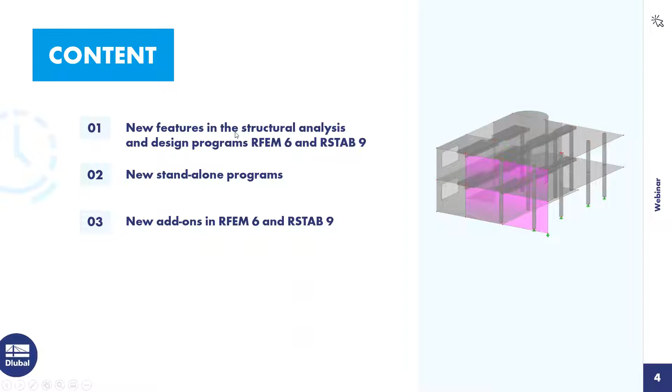Okay, yeah, only some features here. We describe most of them directly in the program, but it was important to me to add here the links to the website where you can find more information.

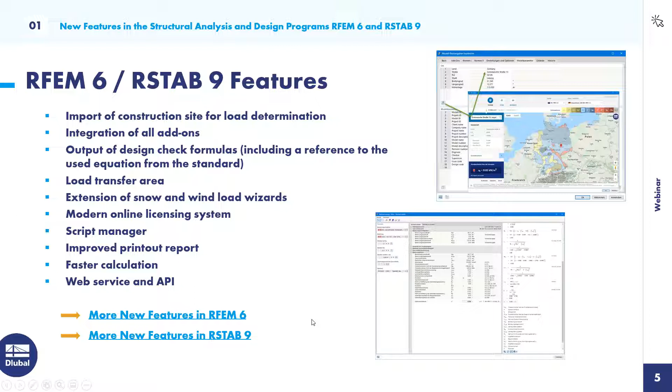Under for RFEM 6, you can see a lot of features, and in this webinar we will introduce only some important features, but you can use the links when you download the slides after the webinar. At the end of the webinar, I will show you how you can find the slides.

Second point, new standalone programs. As already mentioned, RSECTION is a combination from ShapeThin and ShapeMassive for thin-walled and massive cross sections, and the stress analysis. Then an extension of RSECTION, effective sections for the design, for example for cold-formed and thin-walled cross sections. Then RWIND, not only with stationary incompressible turbulent wind flows, now also with transient wind flows.

Then the web service and API, a programmable interface for RFEM and RSTAB. Andreas Niemeyer will show you the web service or parts of the web service later in the program.

Okay, new add-ons: the Steel Joint add-on, all steel connections by using an FE model now. As I mentioned, more information with this link.

The building model, to define and manipulate a building by means of stories. You can consider and display story masses, and it's also possible to output section resultants in global direction for determining shear forces. Those features are quite important for the dynamic modules or dynamic add-ons.

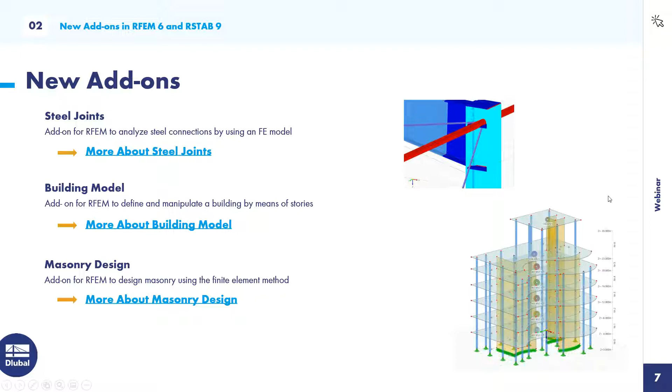Then two more add-ons: optimization and costs, CO2 emission estimation. For example, you can use this model to optimize models using artificial intelligence. I think a very interesting program. Then time-dependent analysis, to consider time-dependent material behavior of members.

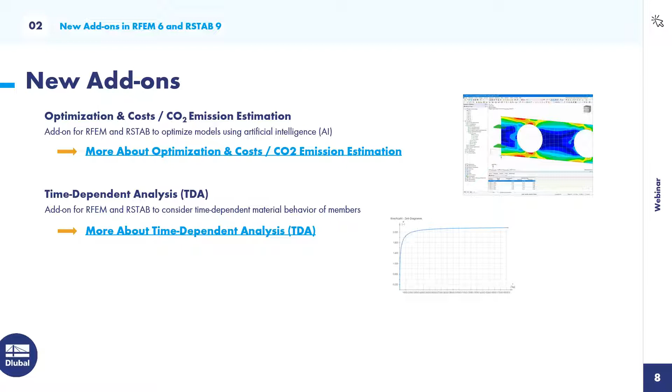I'm coming to the first block, and I'm proud to get the time to show you the first scenes of our new program. I opened our base data dialog, because here is the basic key of our new RFEM 6. Generally, this base data dialog is almost similar to our old solution, but it isn't. You see you get a bigger list of tabs where you can define something, and this I want to show you now in the next few minutes.

At first, before we start, we give a name, of course, like always, maybe intro. And here is our first bigger change in the program. You get now as engineer new types of models, or let's say calculation environments. Of course, we offer the basic plane options, plate options, and maybe member or axial solutions. But you get here, besides this pure plane, also a plane input mode with a 3D calculation.

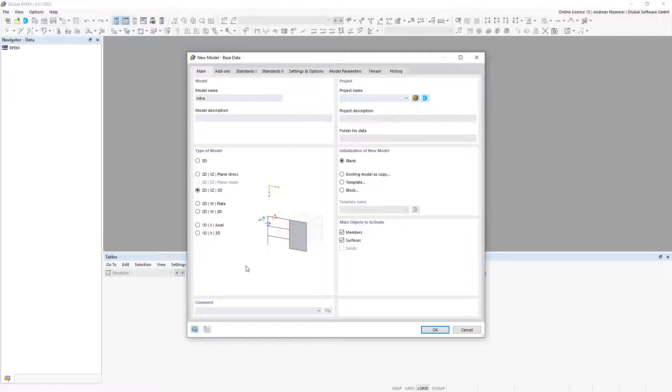We call it internally 2D, 2.5D mode, but this option is available for the plane, plate, and axial solution, and gives you the option that you can calculate plane structures with asymmetric cross sections with loads out of plane in one calculation environment. The keyword for this is, for example, if you want to design a wind bracing of a steel hall with tension members and truss members from angle cross sections, then the angle cross sections can bend out of plane and you get the real stresses on these members. But for our presentation now, I go back to 3D and open the next sheet here.

And this sheet is, let's say, the key for everything. Here you define your task, what you want to do in RFEM 6, and we distributed it here into three main parts: add-ons, our old so-called add-on modules, here analysis add-ons, design add-ons, and special solutions.

And this is our complete list of add-ons now. We got in the past some customer feedback that we offer so many add-on modules, and it's not clear which add-on is for what, so we summed up all this stuff into this list here. If we take a look, for example, on steel design, we have now one add-on for steel design with all standards. Before it was like you have one add-on module for Eurocode, one add-on module for US standard, and now everything is in one package. Steel design makes the steel design for all foreign standards available in the program.

And this logic is quite bigger as it seems now when we take a look on concrete design, because here in concrete design you have also, let's say, all standards behind and also all types of elements, maybe punching nodes, members, and surfaces also.

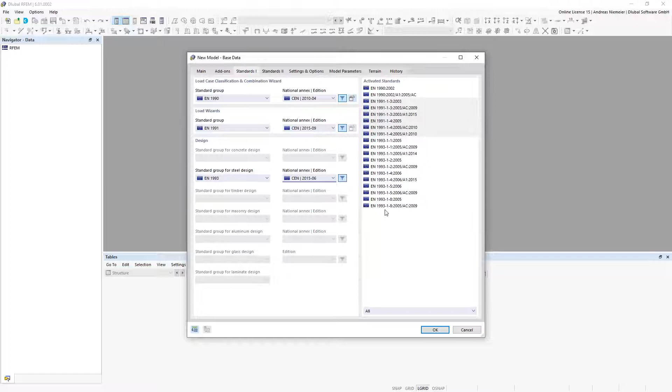And I selected like this here and set up my list for standards, which will be used for the complete calculation in RFEM6. And now I open the program with this specification and want to give you a first view of how it works together. If we open now RFEM6, it looks in the first view like our last generation, but let's say we changed a few points.

For example, here in this navigator structure, we created now a navigator with a cleaned up structure, which means we have basic objects like node, lines, members, and so on, and every basic object has specific types. For example, if we go to nodes, we have here type for nodes. It's the same for members. If we go to members, we have type for members, and all this type for members could be assigned to any element. And the same logic you will find here in the table block below with these two multi-combo boxes, where you can see you have your structure and also basic objects and type for elements. And this should help you not to lose the red line in the program.

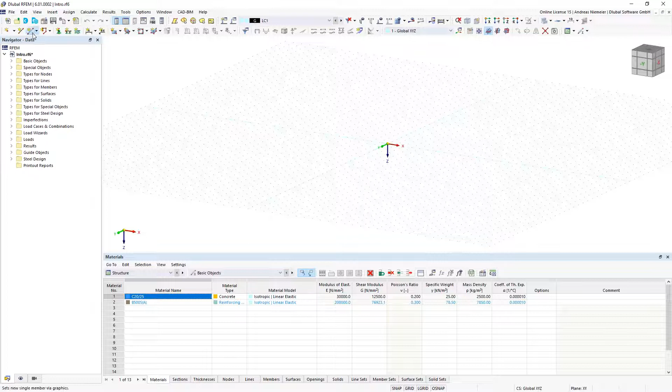And now, how you work with the program. Let's define one member, for example, with a specific cross-section, going to library, going to, for example, rolled cross-section. Let's select an HEA 200 from steel 355, for example, and select it. Then you see you can still pick the grid points like you know it. In the old program, you can define a beam. Of course, you can also place now supports on the end of the beam by drawing a window about.

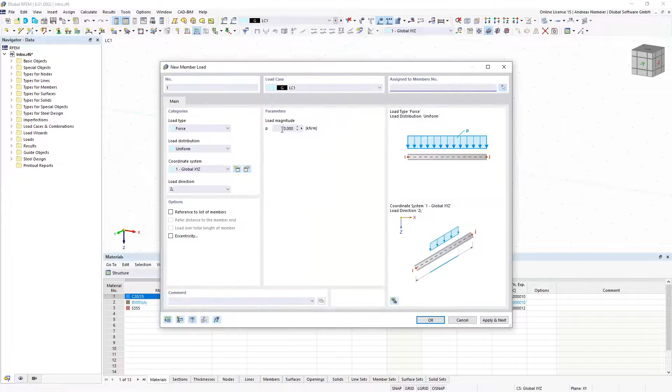And even it's still possible to place a load on the beam here. So for example, 10 kilonewton per meter. So this should give you the information that if you are able to work with RFEM5, you are also able to work with RFEM6. But now there is a specific point where a change is coming.

In the program, RFEM6 always prepares everything so that you can do the design directly. This means after the load input, it's ready for designing. So if you go to calculate, the program creates mesh, calculates load cases, creates design situations for the design, and does a design. So you see all the steps that are done, and it's ready.

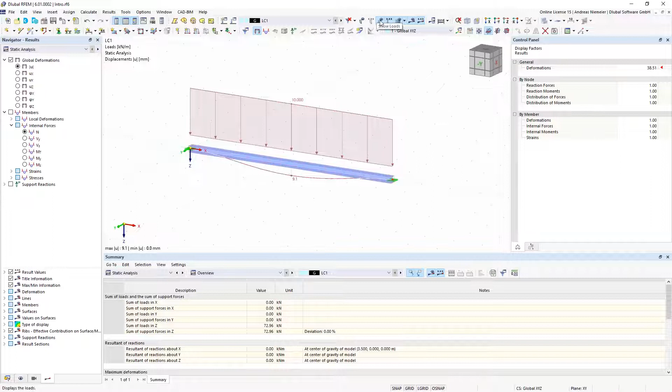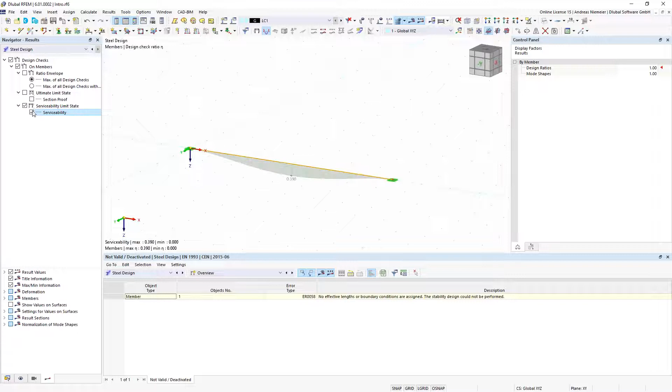So we get, as expected, for the load case selected on the top, the deflections. We get, let's say, forces. Let's use the wireframe model, and we get also a design. So we have here now a combo box where we can select the design, and you see this is the utilization curve of the design, the steel design in this case. You can see a ratio of both, but you can also see only cross-section check or serviceability check, or all together, all lines together in one.

This is now only the graphical depiction of this problem, but we can also display the detailed results in result tables. And this is now new. It's not drawn into a window above the model. It's implemented into the main program. So you get the design ratios as ratios or table rows in the main program by a table design, maybe table by design situation, by loading, or by member.

And if we go to member, you see all checks that are governing here. And if we select one, we can go also into details and see which figures lead to this utilization, which forces are used, which section properties are used, which classification is done, and which figures with hint to standard chapter lead to the utilization.

Because this was also a little bit cryptic, we implemented a formula display where you see the full calculation of the utilization, like a hand calculation, with a clear description of all used variables and filled values. So you can say please show me formulas without and with values. This is a really cool style to display how the design is done without the black box character. And this is not only for steel, but for all types of materials we support—concrete, aluminum, timber, whatever. So this is the new style of display of design checks in the program.

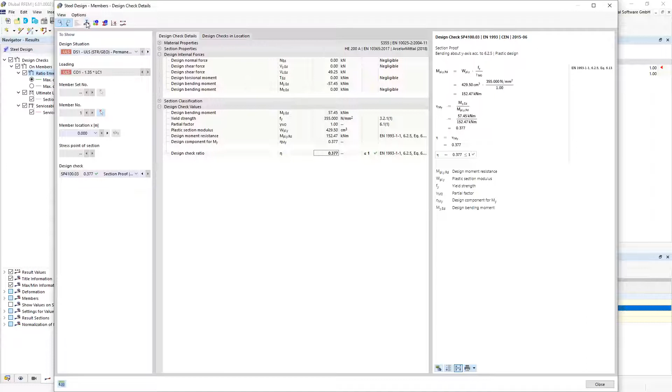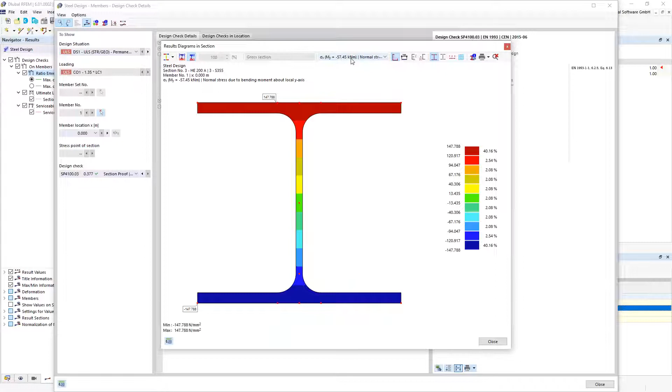If you need more details on basis of cross sections, you will find this button where you can display the utilization on basis of cross section for a selected X place. Here you can not only display utilization, but also the existing stresses for the forces acting. In our case, we have maybe a bending moment of almost 60 kilonewton meter, or also a shear stress, and you can display it on basis of cross section here.

This brings me to the end of the first block, and I give back to Andreas.

Okay, thank you. I show my screen. Do you see my screen? Andreas, do you see my screen? No. Now, now, okay, it took a while. But as I mentioned, we alternate the presentation—some features from Andreas Niemeier, some features from my side.

I go back to the base data, the fifth place from left here. Andreas Niemeier already showed the dialog, but not the model parameters. I would like to show you some more features here, a very good feature.

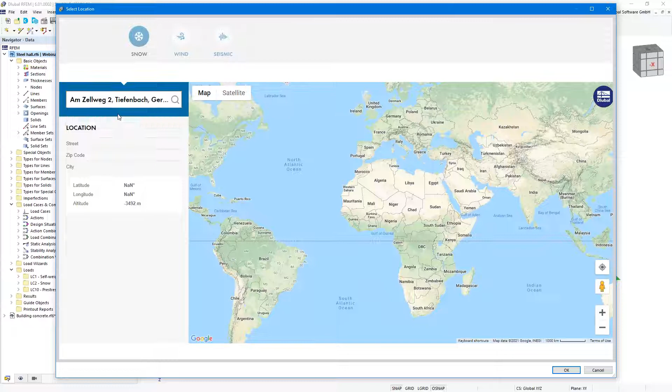The construction site can be specified on a digital map. I can open that map, and this data is used by the load wizards. I enter our location, our main office address in Tiefenbach, Germany. Then I get the snow load zone, and what is important for our calculation, the characteristic value of snow load, 0.51 kilonewton per square meter, the wind loads, and the seismic loads. Then I can apply that, and the program reads all parameters for the wind load wizard and snow load wizard.

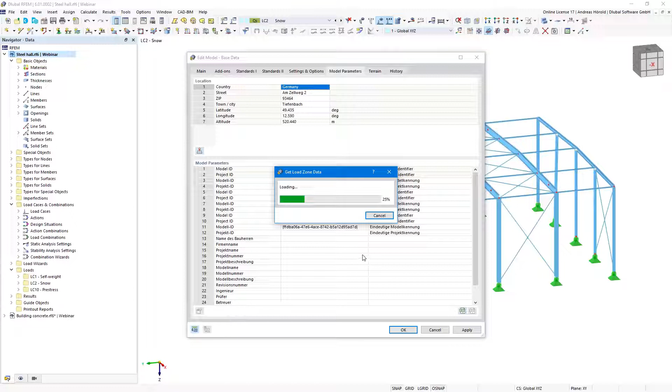And in future also the dynamic values—that's still in work, the seismic loads, the import of seismic loads for the dynamic modules. Okay, that takes some seconds. The website seems to be a little slow at the moment, that's why it takes some time. Now we have to wait. That's the connection between website presentation and the GoToWebinar tool. Sometimes some processes take quite long. When I don't use the GoToWebinar app, that takes only 2 or 3 seconds. It doesn't seem to work at the moment. Maybe I come back to this feature later, because there's a problem with our website, I assume. Okay, I cancel that.

And jump to the next feature, the load transfer surface. If you have such a model, for example with slabs and walls, but you don't want to define all walls because here is a glass facade, then you can use this new feature, the load transfer surface. I will show you how to do that.

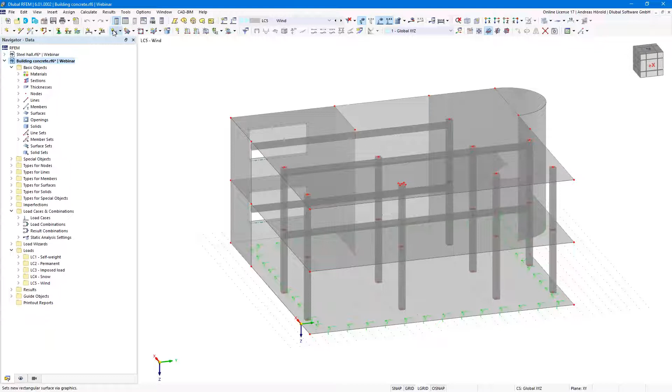I open here a new rectangular surface and the new stiffness type load transfer. A new dialog opens, then the load transfer direction. You need to define the direction in X, Y, or both directions. It's also possible to set a surface weight if you want to consider the weight of the glass facade or trapezoidal sheets, etc. Then I apply that and create the surface.

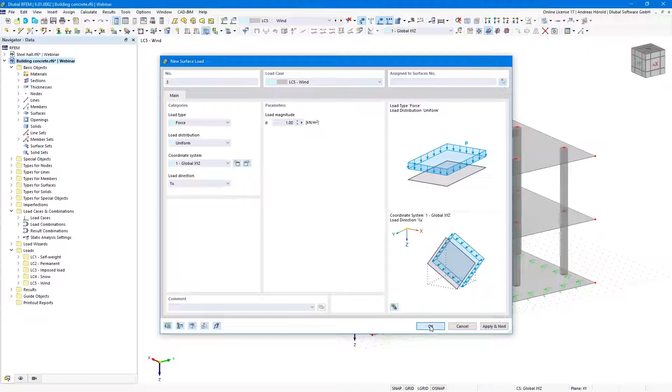Then a small wind load, new surface load—for example 1 kilonewton per square meter, Y direction. That's the load. If you want to see the line loads, the separated loads, turn to the display navigator, and under surfaces select display load transfer separately. Now we can see the line loads here. It's easy to change the direction by double-clicking the surface, then set load transfer in Y direction, and now the line loads are visible here.

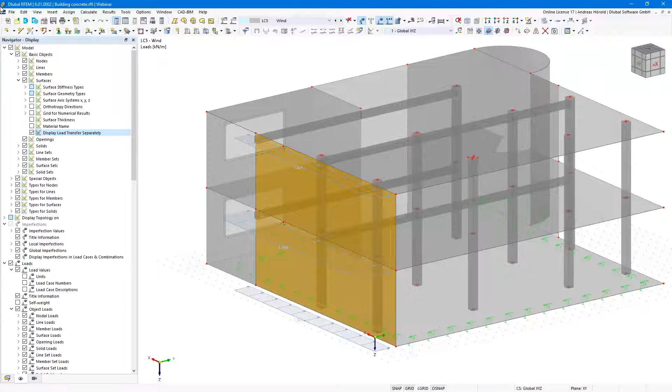Okay, then I hand over the screen to Andreas. I'll take a look at the first model in the meantime, what is wrong there, and then we can turn back to this model later. Andreas, please continue. Okay, thank you.

Let's go ahead. I prepared a model for you, a two-story solid model from concrete and steel elements. I used load transfer surfaces in windows on the roof. I think it will solve us a lot of issues and save time. But this is not the point here.

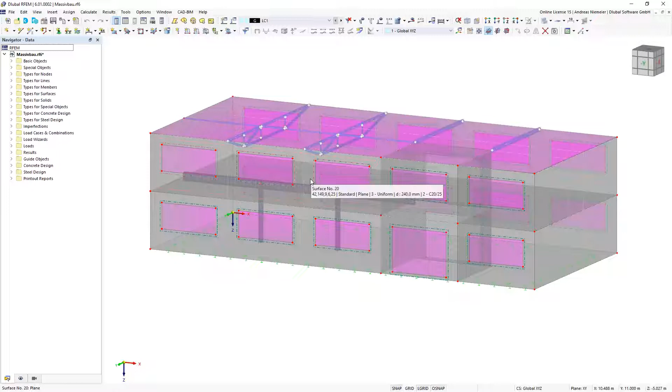I prepared this model to show you how we can specify the design of elements, and take a closer look on the beam elements. Inside the building we have concrete beams on columns, and on the roof some steel beams, truss girders with bracing - typical structures we see from our customers.

Now the question appears: if we have to design the truss girders, we have to specify that the upper chord is supported against lateral deflection on this mid node. As you saw in my first presentation, the program always thinks the design is done for the element and prepares everything, but it sometimes needs more information.

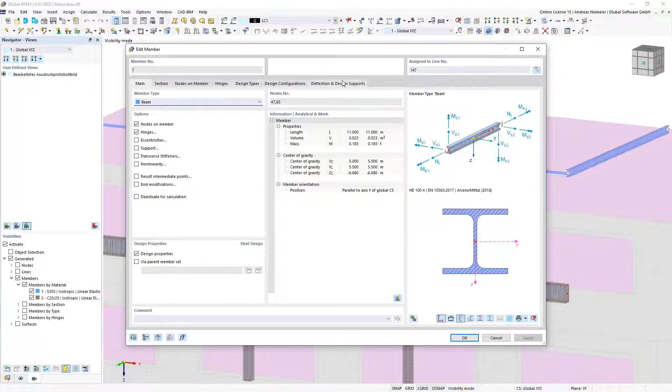If you have to give more information, you can double click on the elements and get into the property of the selected element, with all design relevant options. So here you have sheets where you can define the effective length, boundary conditions, local section reductions, shear panel, rotational restraint, and so on.

For concrete it's something different. Now the task is, we have two apertures, so I have to make a multi-edit and select both to change both. But this is questionable, because if you have a bigger model you don't see all similar objects, and therefore we give you a new function to solve this.

If you go to base data, you have settings and options where you can activate member representatives. If you activate member representatives, you get a sum up of all elements, and you can visualize it. The program visualizes on all elements a colored bubble.

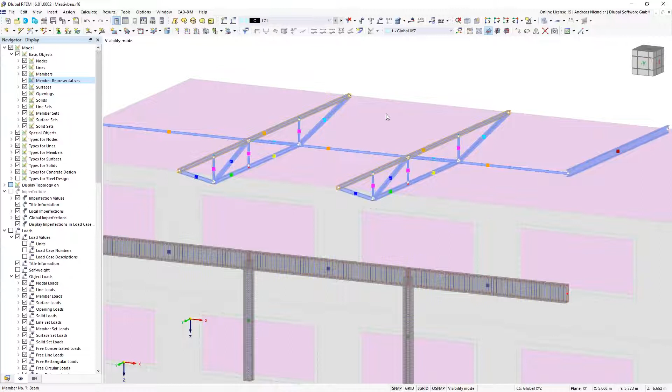Let's select the red one, and you see the program automatically recognizes that these two elements are similar. The same for the vertical elements - it recognizes these are similar too. This means the program found out from our 31 members that we have 10 similar groups, and this information we can use for specification of design properties, for documentation, and for pure calculation.

So this is pure information that helps us save time again. Now back to our primary task to assign some properties.

I can double click this red bubble for the aperture and go into design types, to assign some buckling length definitions using the representatives. Now to the next feature.

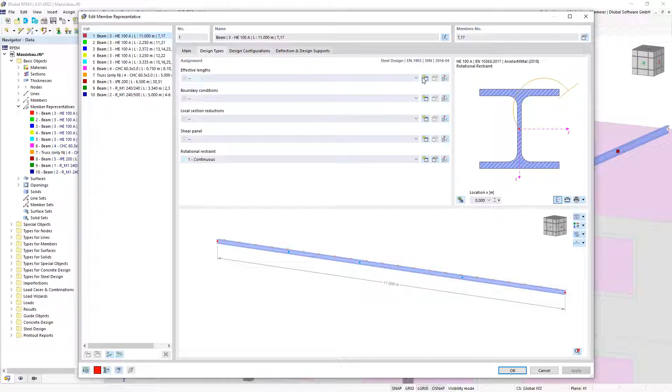If we want to define buckling lengths, as engineers we want to define buckling lengths and segments. If we watch this element, this aperture is supported here, and we have one segment here and here. For this task we prepared effective length types or templates - I call them jackets because I like this term.

So we create a buckling type jacket, which we wrap around these beams. This means we say: please check buckling about Y, about Z, about torsional buckling, about lateral torsional buckling, do it with the eigenvalue method, and make a fixation on the start and end node of the element, without knowing how long the element is right now.

Because we want to apply it on these apertures, we say please do it for this type. The program realizes this type has 1 intermediate node, so I say let's fix the intermediate node. This means for the buckling definition we have one segment for the strong axis, 2 segments for the weak axis, and 1 segment for the torsional checks.

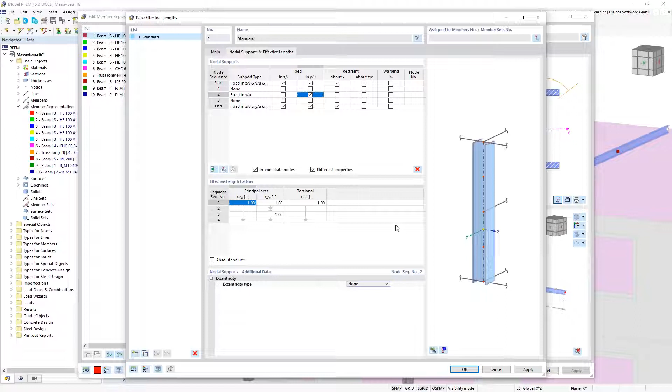If we want to support, for example, also the first one, we can open this setting. Let's go to the steel types, to effective length, and say please check also the first one. And if we confirm it, we get also a fixation on this point and can visualize it.

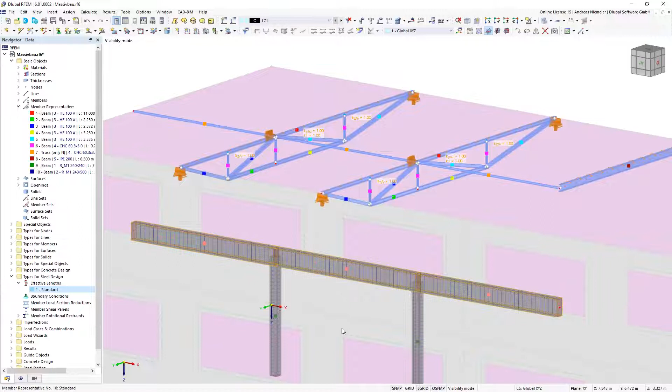The same logic we can use also for concrete. So if I go, for example, here to the beam and say I need another reinforcement, not a buckling design, I go here to longitudinal reinforcement and say I don't want to have here 3, then 4 rebars with a diameter of 20, and confirm it.

And then the program also updates here this setting for all beams that are connected to this representative. And this brings me now to the end of this part. I only wanted, and for me it's important, to show you that you can define all this design-relevant data in the main program by using all tools of the program plus this new representative logic.

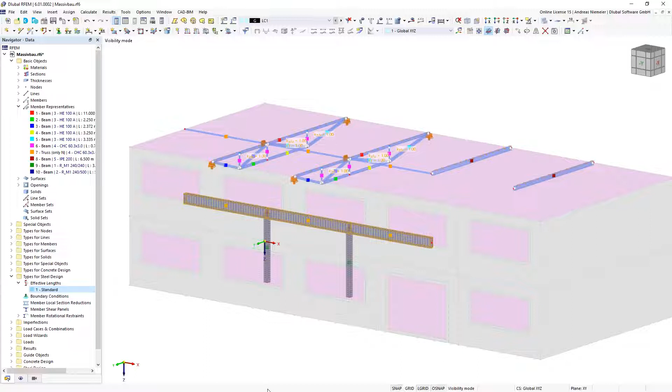Okay, I imported the data again. Yeah, it took 2 seconds without presenting my screen. It's real strange. But now I would like to show you the real advantage of this feature.

I go to the load wizard, the snow load wizard, for example. Yeah, that's the same wizard as in RFEM 5. But I will show you some features. So that's quite the same, selecting the edges here or the corners.

One feature is you can deselect areas. That's not so important, I think, for the snow load generator, but for the wind load generator, for example, imagine you have a neighbor building here, and that's a face here, and you don't want to consider wind loads on that surface. Then you can deselect the face, and no wind load will be generated.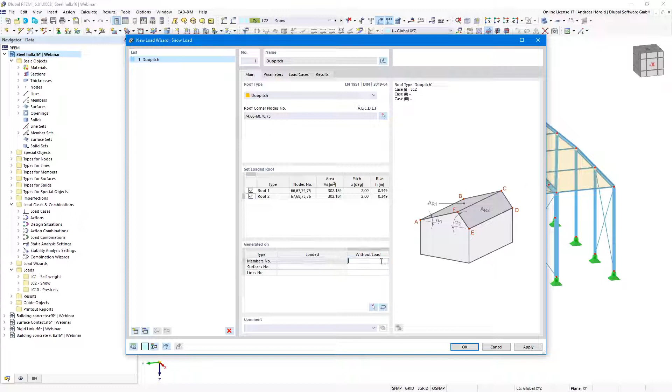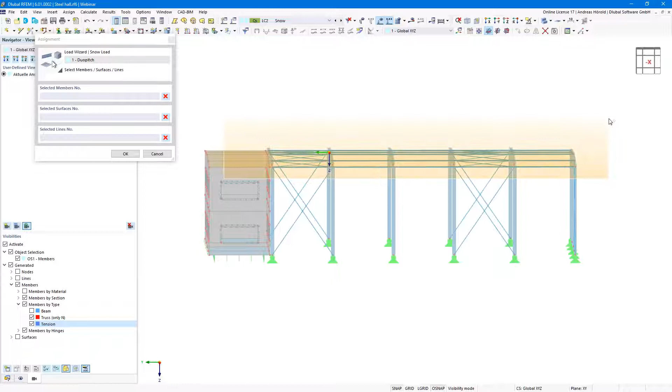Okay, I select the members that shouldn't get any load. I go to the navigator views, and then I select members by type, the trusses and tension beams. Okay, so that's okay.

And that is the real feature, the import of the location data and the parameters of the location, the load zone, the altitude, and the characteristic snow load.

That's the new feature. Of course, you can define snow loads also manually. Then snow overhang and snow guard, it's still there, or it's possible to consider. Then you can lock for new objects if you add new objects later, but these objects shouldn't get any load.

You can select this. Then you can consider member eccentricity. For example, a member is outside the selected area, but it's inside because of its eccentricity. Then you can select this to consider this beam, or you can consider, for example, here with the last check, tapered beams.

Okay, the program suggests to create three load cases. The second and third one is for half snow on the left or right side. I deselect them. I would like to only get this full snow load.

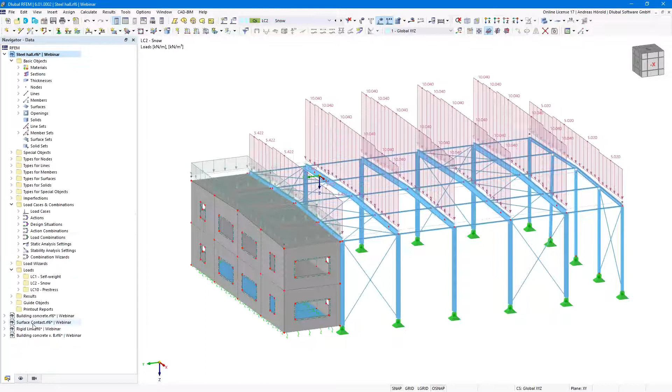I come to the next feature with the next model: surface contact. A surface contact describes a contact property between two or more surfaces that are at a distance from each other. And important, that is the difference to RFEM 5: it is no longer necessary to create a contact solid between the surfaces.

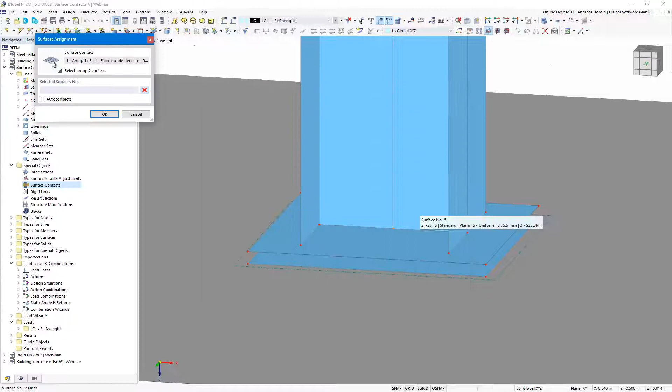I go to special objects here, surface contacts. And as I mentioned, you can select one surface here, but also a group of surfaces. I select this surface and the opposite surface. Okay, then I need to define the surface contact type.

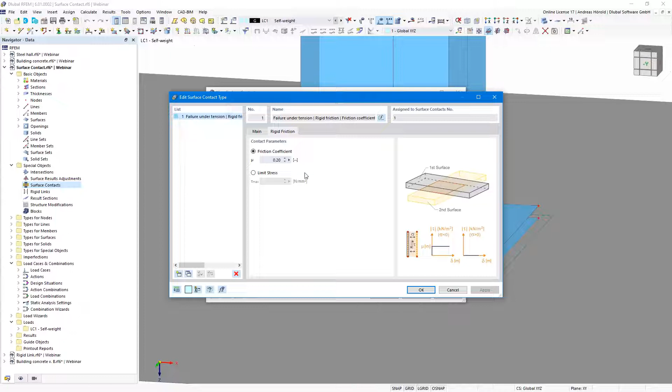Most of you who worked with the contact solid in RFEM 5 know the options here: full force transmission, failure under compression, failure under tension, for example, rigid friction, and I leave the friction factor as it is. Okay, and you see here the small lines, and that means there's a surface contact.

Now let's check this. I create a load here, a nodal load, only a small horizontal load and a larger load in the Z direction.

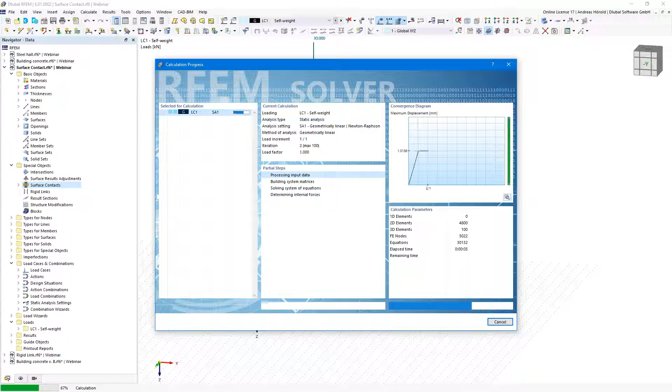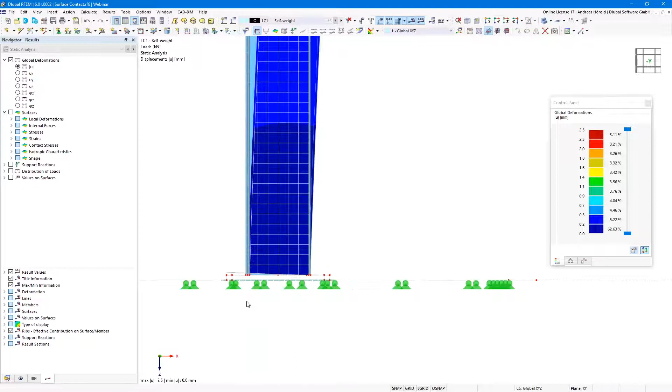Okay, and then we can calculate the load case. And the upper plate should move in opposite direction, should lift a little bit up. When it's finished, we take a look at this. And as you can see, this plate here lifts a little bit up because of the failure under tension. Okay, that's all to this model and to this feature.

Next feature is rigid link. Usually we connect surfaces by axis, but if you want to consider the thickness, I show you what I mean. Under rendering model, solid model, surfaces, you can see the fillet surface, including thickness. If you want to consider, for example, a weld here and don't want to connect to the axis of the surface, then you can use a rigid link, also under special objects, rigid link.

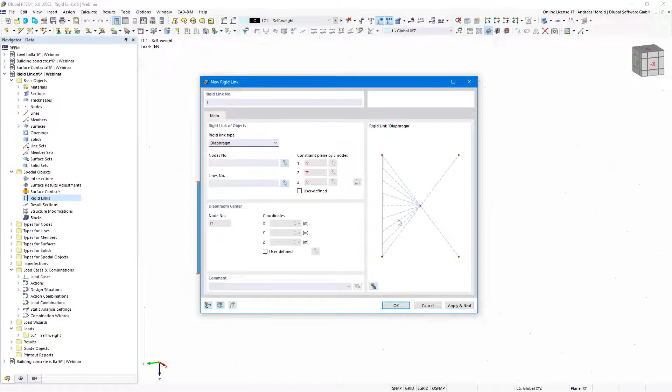There are 3 options here: line to line. If the opposite line is already created, then line to surface, then the line in that surface will be created automatically, and you can consider a diaphragm. I use line to surface, this line here, and this surface, and the line in the surface will be created automatically, as I mentioned. Okay, the rigid link is created.

We can calculate all. I already defined a nodal load. I can show you that. That's the nodal load, and as you can see, it works.

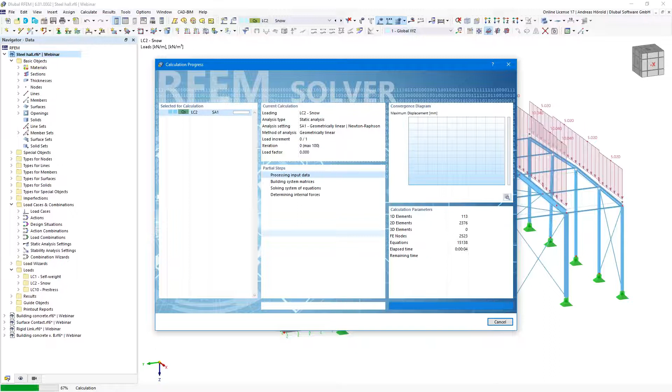Okay, I turn back to the steel hall. I calculate the snow load case so that I can show you the next feature, the result diagram. We implemented some new features. You can display the overlapping of results. For example, if you have similar structural components in one model and you would like to analyze that.

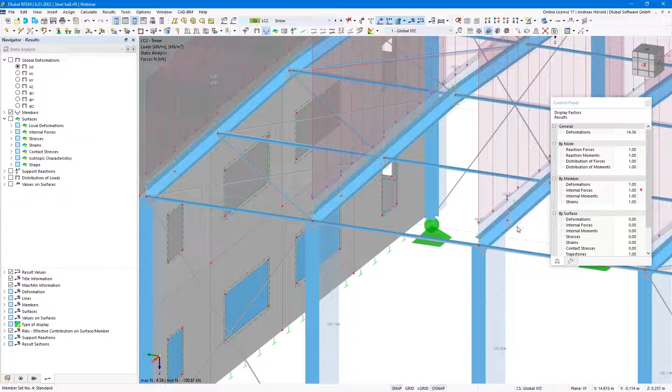Let's select these 3 horizontal beams. Here's only a smaller load, and that's why you can see a good effect. I select this member set, this and this, then right click, result diagram. So, and I check here MY. Now you can see the 3 member sets.

Consecutive, but also overlapped - that's an option. That's the left member set with the smaller deformation and the smaller MY. Then we can show that overlapped and enveloped, only the maximum values of the deformation and the moment of the 3 member sets, and overlapped description.

Other old features, for example smoothers, are still implemented. But a very important feature is that you can work parallel in the program and in the result diagram. If you have 2 screens, you can move the result diagram to the other screen, and I think that's a quite good option. Okay, then I hand over the screen again to Andreas Niemeier.

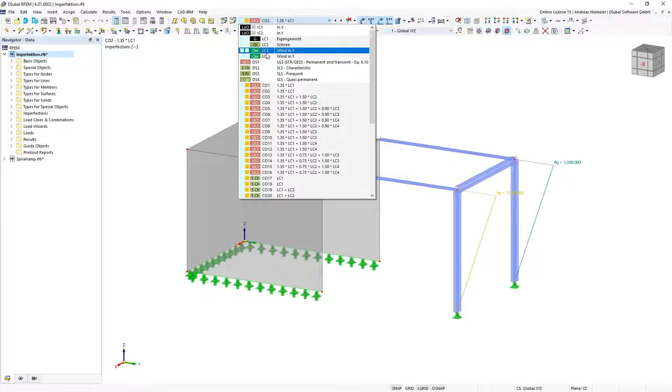And this is the keyword. I want to show you how we implemented or how we reinvented imperfections in RFEM 6. And imperfections now will be organized in individual imperfection cases. This you will see here on top in this list box. So in the past we did this with load cases, and now you get individual imperfection cases for this.

And here 2 cases in X and in Y direction, and these imperfection cases are organized between the model data and the load data. So the place is exactly here in between, where we have these 2 cases. And these 2 imperfection cases could be assigned to, let's say, load cases and load combinations. The place is here, so let's take a look on load cases. You get now an option to assign here to any load case imperfection by check and by selection, and the same here in load combination.

In this special case here, this imperfection cases or the allocation is grayed. The cause is because all these load combinations are generated according to a wizard, so he decides which imperfection should be used. And this is maybe even a feature now, how we can teach our wizard which imperfection should be used for which combination. And this was in the past even, let's say, a quite exhausting step, and we improved it a lot. So if we go back now, you will see that we teach now these imperfection cases assignment to a specific load case.

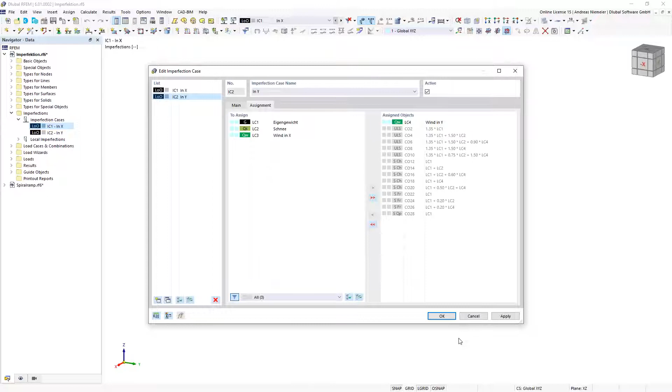Let's take a look back at this menu. Let's open the load combination sheet, and you will see the list will be reduced. Let's take a look at what happened now.

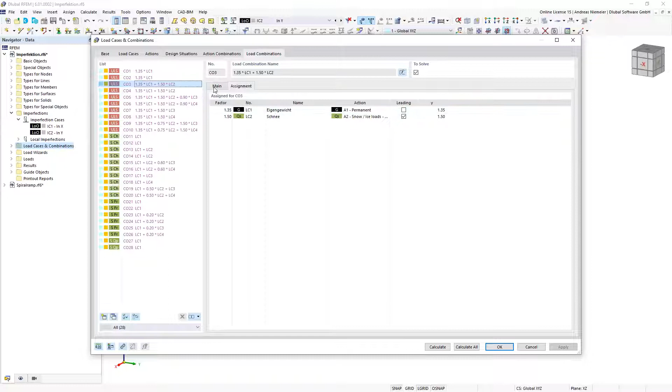For load cases I call symmetric load cases, maybe self-weight, where we have only vertical components, it's not clear which imperfection should work. So the program allocates one in X and the same for the Y axis. The same for snow load. So if we have self-weight and snow load, we have one imperfection in X and one in Y direction.

But once we get one load case into the combination, you will see we have wind in X. So the program allocates directly an imperfection into X. The same for wind in Y direction, we have an imperfection in Y direction.

With this logic, you can assign imperfections quite efficiently by giving only the governing load case into the allocation and getting a combined result back within seconds or fractions of seconds. So this is one feature.

But now if we watch the model, a question could appear: we have here imperfections, in this case global imperfections on members, but what about shells? Can we also incline shells or not?

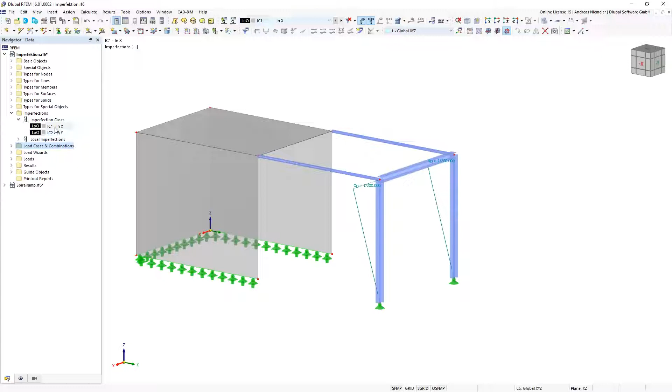In the past it was not so easily possible, but now we extended these imperfection cases with imperfection types. One imperfection type is, for example, this initial sway via table, where we can say the building is running in this elevation, the imperfection should run in X. We have maybe one ordinate at 0, and the building height is in this case 4 meters, and the imperfection is, for example, 200.

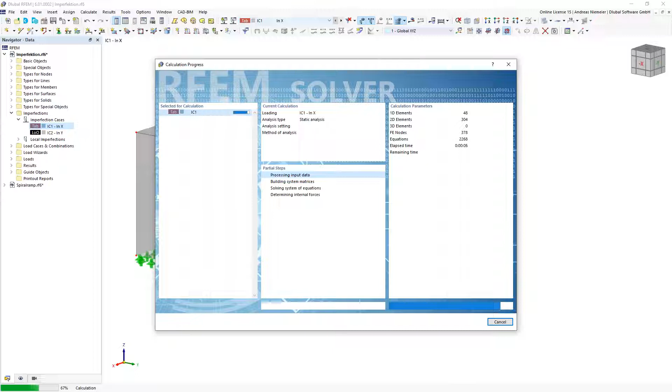With this definition the program knows it should create a geometrical imperfection for the calculation of the load cases with the sizes defined in this table. Here we can create geometrical imperfections not only for members but also for shells, so for everything together. The program inclines it with this imperfection magnitude. This is not a deflection, it's only a picture of the deformed mesh used for the geometrical nonlinear calculation.

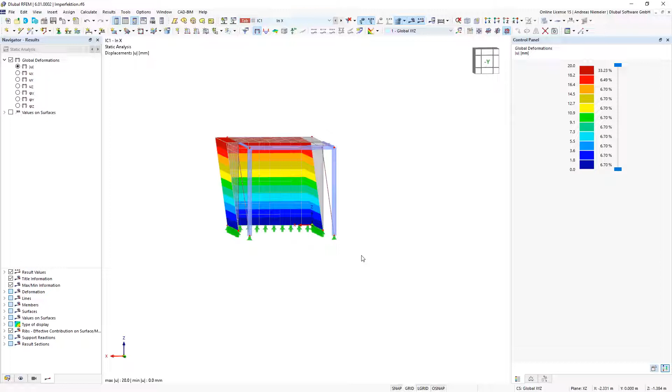So this was one basic feature I wanted to show. The next feature I want to show is our new printout report. For this, I prepared a file or model, not a regular model, so it's curved and doesn't fit into all these rectangular shapes, only to see the limits.

If we want to create a model, we go into the navigator one stairway, not up but down in this case, and create a new printout report. This step leads us into a selection.

Here I can select what should be mentioned. Every check stands for a spreadsheet. I collapse it here and say, please show me for the static analysis only the summary. For example, I reduce this table, and for the concrete design, I only want to see from the results no warnings, only ratios by members, ratios by surfaces, and the reinforcement will be covered by pictures, for example.

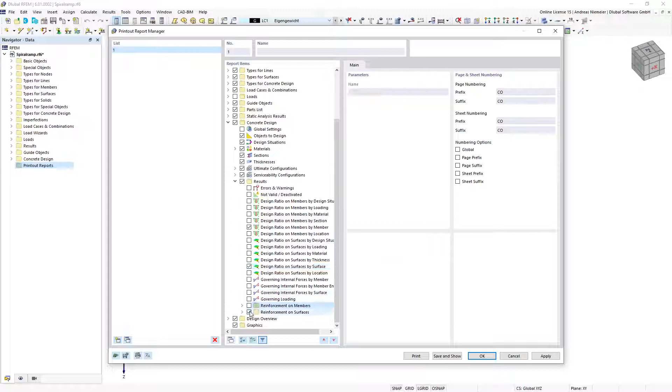If we start the generation, the program has now a bigger change in relation to the old program: it exports the data into the environment of the printout report. There is no direct bidirectional connection, we simply export the data into the report. So these applications are working parallel, meaning we have the report and we have the main program.

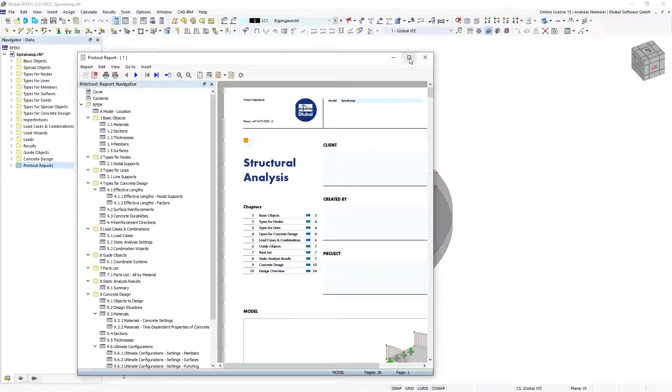This feature helps you set it up, but also gives you a designed report with content, with explanation pictures in the right scale, with information about everything you defined, about the concrete cover, about the durability classes. All this is explained and prepared for your clients in a nice shape.

But of course, we know such a report only works if we have pictures explaining the results and model. So you can improve it with pictures, let's do this. We print a few pictures, for example one of this model, and if we print this picture, we've implemented something like a preview.

So we say, please print the current picture, not tiled, and as 3D picture as window filling. Now we have it, so as window filling we get this picture in 3D, I can explain afterwards, and we print this picture, how we see it now, into the report. I don't have to show, I can only confirm it with okay.

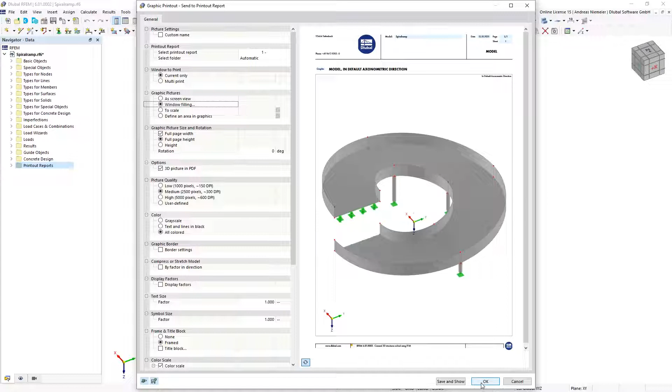Then we make maybe a detailed picture. Here we implemented also a new feature. For example, we can say please show me the concrete type, the reinforcement. Let's make here a transparent model, and we want to give a specific section of our graphics into the report. So we can go to the printer and say...

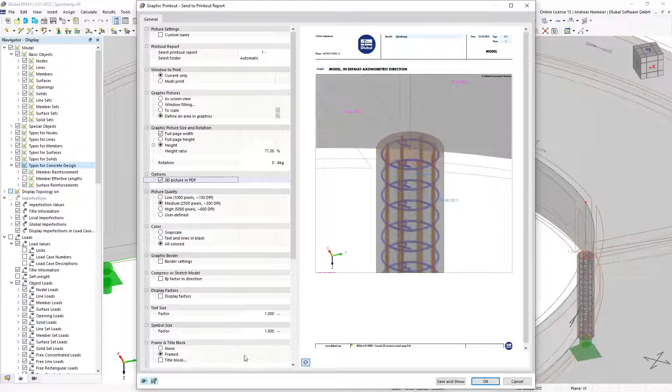Please make a defined area in graphics, and we say here, nope, please print us maybe this section where I can give an explicit definition in graphics, and the program finds the right scale to print only what I selected in graphics, and of course with 3D options. And now I can move this into the report. And if we go to results, this is also possible.

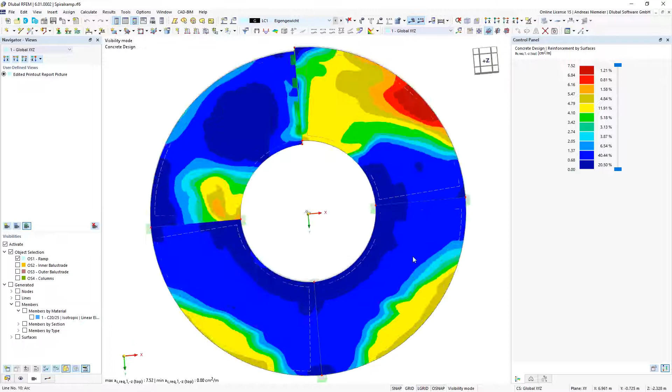And if we go to the printer we get again our preview. You see, in this case, the program tries to find the right scale, but I think the scale is not optimal because it's too small. So I say please use scale. 1:50 is okay, but it doesn't fit on the page, so we use full page. Maybe it makes it better. But as expected, it makes it not better.

So we have here a new tiled option. The program creates now tiles according to the defined scale, 1:50. And you see, we have here also an overview sketch, and the program creates a picture with the overview sketch with the scale that is defined.

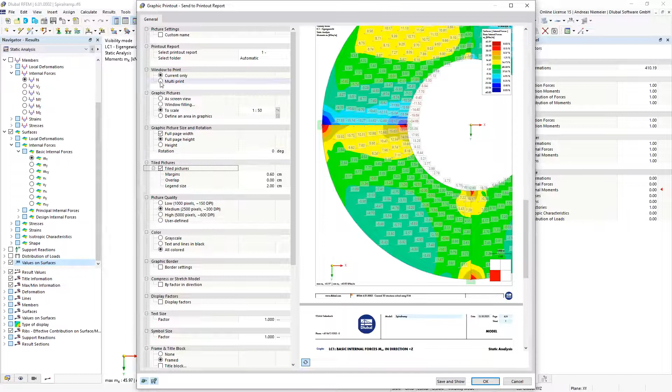And this is nice, but now we realize as engineers we not only need MX but also MY. This is no problem, because you can extend it to a multi-print, go to results and select MX and MY or more, whatever you want. And if we go back to the preview, the program updates the preview with these additional result types according to the specification we made about tiles and scale and so on.

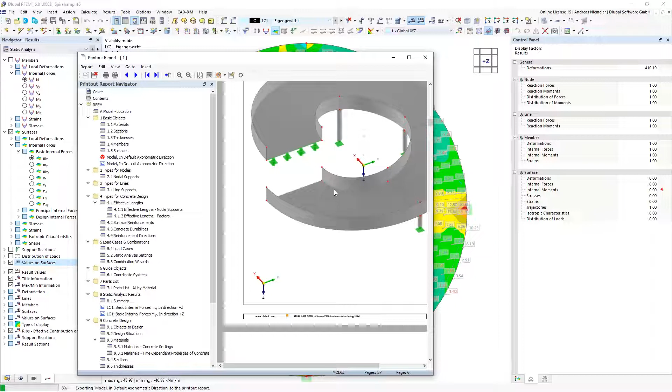And we have now a preview picture, a longer preview picture with all results, and this we can move into the report. Now the program updates the report we already generated and brings in these pictures we just printed. So you see it's opened, we can use it. It's not frozen or something else. You have it already here for further usage.

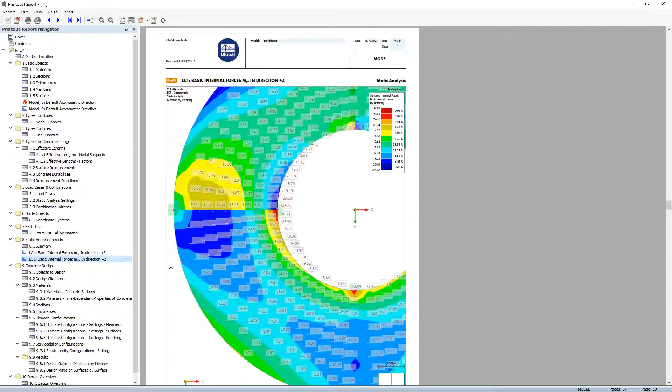And after all pages are printed in, the program updates the content to have real figures in it. And now it's ready, so we have all pictures there, even these multi-pictures are there. There's no performance leak or something else, but it seems good. This 3D picture has a different icon here.

And now we can say we are ready, but maybe we need some additional information. So we collapse all here and say we need a new chapter, for example create folder below, maybe add-on. And we can create here some new folders. We can place it here in between, can change the numbering by moving these chapters, and we can also insert some new stuff, maybe formulas or also a PDF.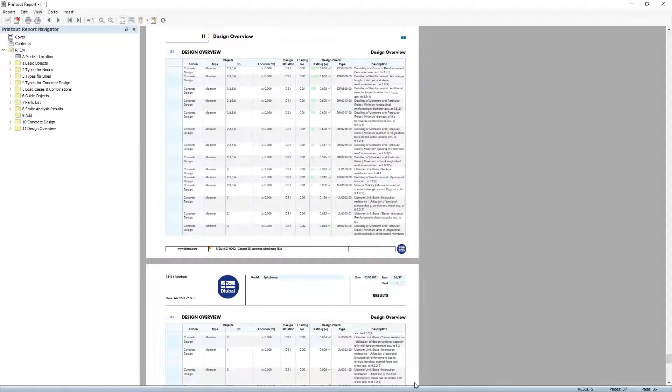Here into this report, for example, we have some reinforcement description PDF, and we say we want to have this page and this page, so 7 and 8. Let's open this PDF with pages 7 and 8 and store it into the report. It places it below the last, but we can move it into our added chapter, and then we have here even these tables from the PDF in our document.

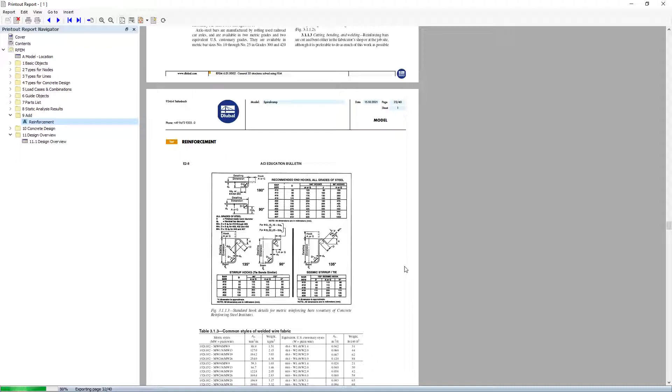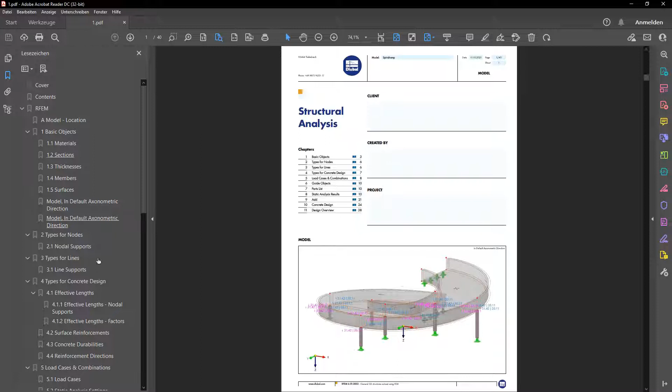And now to sum it up and finalize this report, we can print the PDF and store it here, maybe overwrite the old file. And because we implemented this PDF printer directly and don't use a free PDF printer, we are able to create PDFs which have here a document structure on the left side, and here we can directly jump to the chapters and even to our pictures.

So you see also the Adobe Acrobat Reader has some performance aspects here, but it depends a little bit on this picture, because the user or reader of this document can also rotate the model here because we printed it tridimensional. And this is, I think, a really good advantage for your clients and good to present your work. And this brings me to the end, and I give back to Andreas.

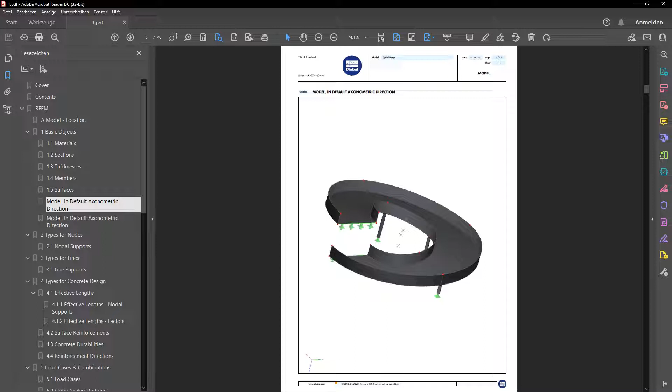The improvement of the printout report is a very good feature, but I can show you another very good one: faster calculation, especially for RFEM 6 and RSTAB 9. We developed the solver manager, which enables calculations to be carried out in parallel.

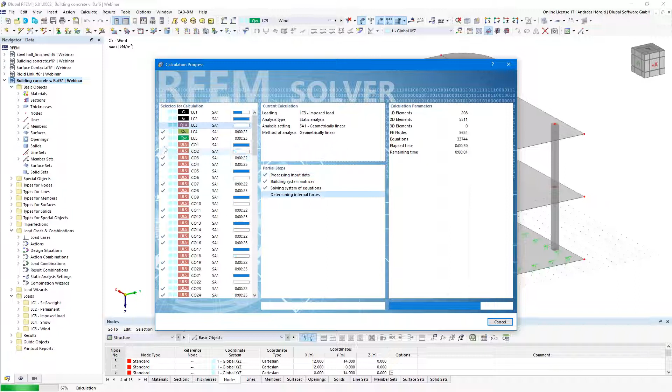I start a calculation here, and as you can see, 4 solvers, 1 per core, can calculate 4 different load combinations at the same time. You can see that a little bit here, and when finished, blocks are completed on the left side. Let's wait a short moment, and you can see more than one core calculating in parallel. This leads to better utilization of the cores and thus faster calculations. I think that's a quite important feature.

Okay, then maybe some smaller features. Sometimes it happens to me that I create a load but I'm in the wrong load case. That's easy to change, just right-click edit the load or double-click it, and you can easily change the load case here. But I don't want to do that now.

I need the results for the next feature, the clipping box. I show results, and if you want to see only parts of the model, you can use the clipping box. You find it under guide objects, clipping boxes. Double click, then select the middle of the clipping box, maybe the middle of the column here, then set the dimensions of the clipping box, and then you can see only parts of the structure.

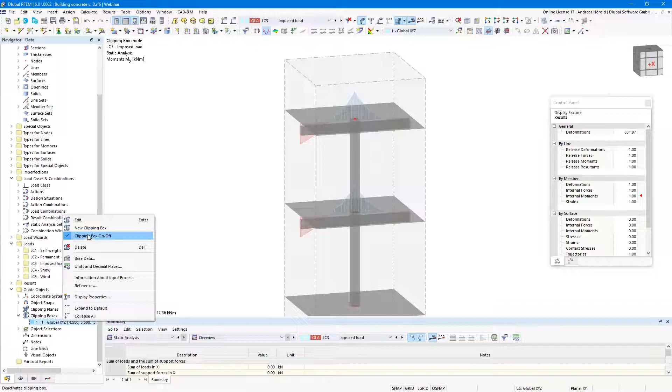Maybe one more small feature: you can decrease or increase loads by right click. Only the display of the load, of course, not the value, and also the display of supports - line supports, surface supports, and nodal supports.

Okay, that was this feature. And I hand over the screen to Andreas Niemeyer for the last part of our presentation. Okay, Andreas, you can continue. Thank you. Last but special, but it gives you a lot of power in your hands.

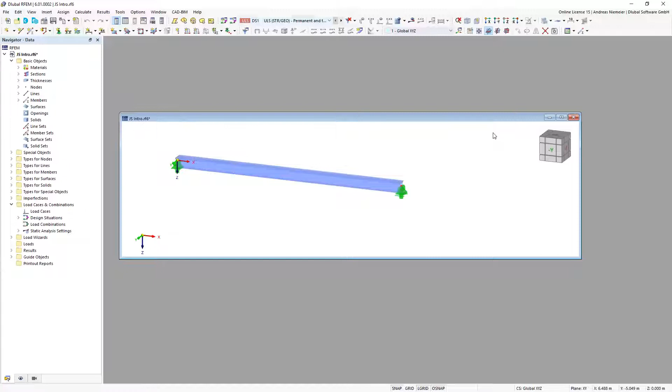I want to say a few words about our programmable interfaces. RFEM 6 is ready to be controlled by your code, and we offer two code options. I'll describe it here with Windows. Everything that is done inside RFEM could be done by JavaScript coding. It offers you the ability to create your own function, so if you want to do something, you can create your own JavaScript function.

For example, you need a function to let a load run over the beam here, so it should act here in one load case, then in the next load case here, and here. You can ask our Dlubal support if we have an add-on for this, or you can program it yourself with JavaScript coding.

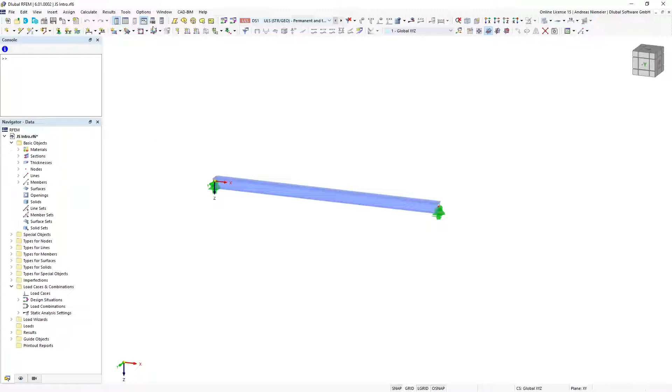For this, we implemented a console and a manager. The manager offers you some examples, but also a chapter where you can place your own functions. I placed it here below functions, and wrote it with a few lines of code. Let's open it with an editor, where you see I defined a few variables for my task: the size of load, how many steps, which element should be loaded, and a loop that creates load cases and member loads with type force, concentrated distribution, global coordinate system, direction Z, load magnitude, and the distance from start.

And if we double click on this function, the program will move it into the console and run this stuff. Nothing is blinking or anything visible happens, but the program creates for us below load cases, some load cases where the load with the size defined in variables is running over the beam. And you see it was not more than 20 lines.

And if you don't know a command, or you want to know the commands, you have here in the console this info button where you see the full package of all commands for add-ons of design, concrete design, geotechnical analysis, whatever.

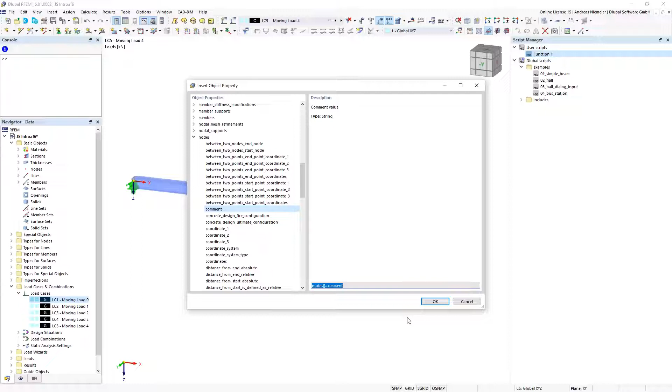If you want to define a node comment, you click here and get the command for how you have to write it in the script. So nothing complex. I think every engineer can learn it.

No problem, I think. This brings me to the end of this JavaScripting, and I go over to the global interface. So if you have a wish to control the program from an external source, maybe from Excel, maybe from AutoCAD, maybe from your database on the other side of the world.

It's possible now because we connected our program to web services. You can set up a server, an RFEM server or Dlubal server, with this function using a specific port, and this allows you to connect to this server and send and receive commands.

And because it's a web service, we now allow the interconnection of different applications over networks of computers, also over the internet. And to give you an easy option to set up such programs, we offer on our GitHub channel for Dlubal Software a Python interface, or Python package, which you can download here.

And using this package, it's a folder which contains the interface data in the same logic as we organize our data in the main program. So basic objects, type for lines, type for members, as I mentioned at the beginning. And you get here, for every element, what you can connect to the option.

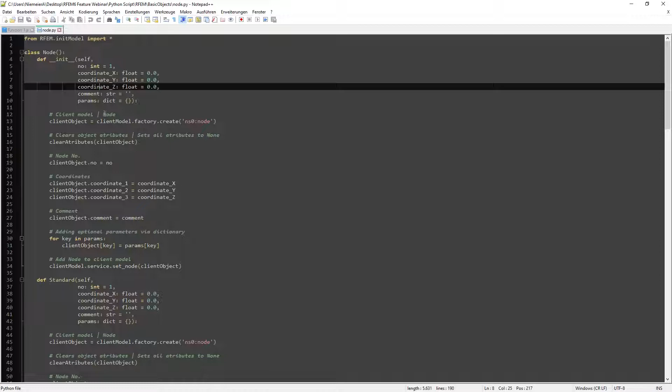And if you open, for example, one in the editor, you see the logic of how you have to write it. For example, for defining a node: number, coordinate X, coordinate Y, coordinate Z, comment, and so on. So it's not a big deal.

And if we run here, for example, an example - you have here a folder with examples. Here's one program for creating a cantilever. And I only create a new file, so that we can close it and open an empty sheet here in RFEM so you can see how it's working.

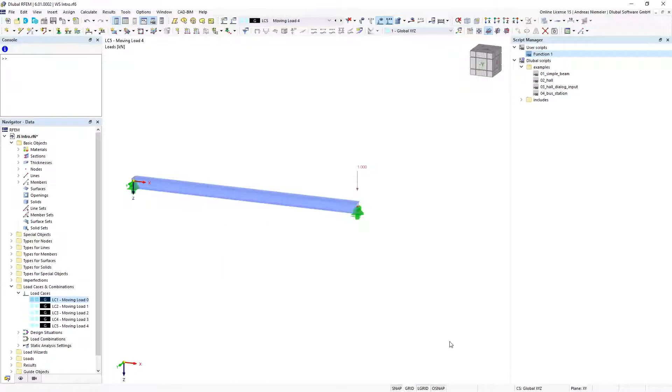So we have an empty sheet here, and let's go back to this program and double click this program. It's starting, it's connecting to the server.

It's resetting the model. It asked me about the parameters. Maybe we want to have a 5 meter long cantilever beam, and the force should be 15. And now the program is modeling it, calculating it, and will give me a sign when it's done. Ready - so now we have a cantilever with a load of 15 with results.

So this should show you how easy it is to create models from an external source in RFEM, and it's also possible to get results back.

And this brings me to the end, and maybe gives you some ideas. With this technique, you can create your own skin over the program, your own tool for designing your repetition parts - for example windows, anchors, consoles, whatever you sell - and offer your clients, for example, a website where they can define it and get an in-time design and a best solution, or you create for your engineers tools only for the stuff you are creating. All this is now possible, and maybe it inspired you a little bit.